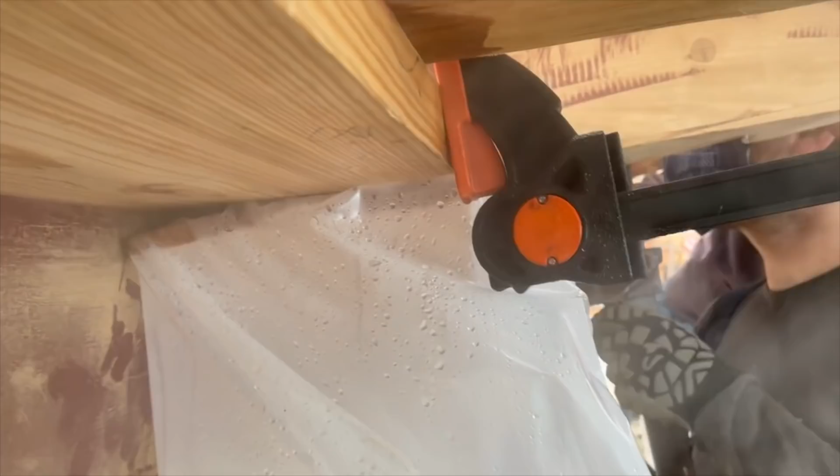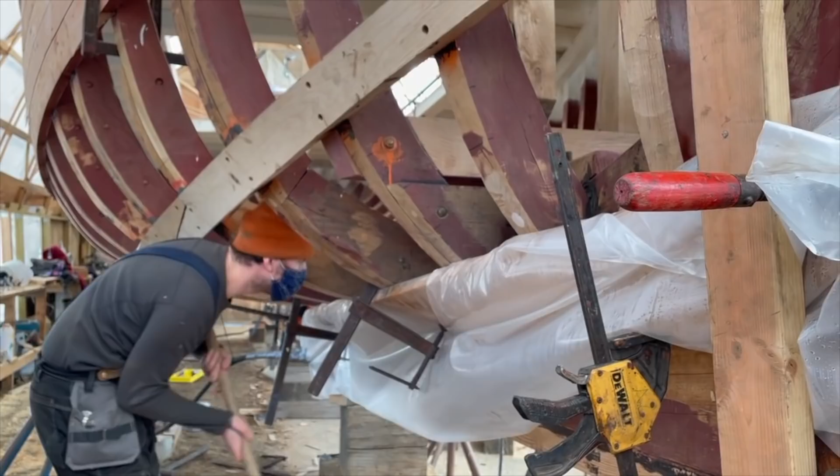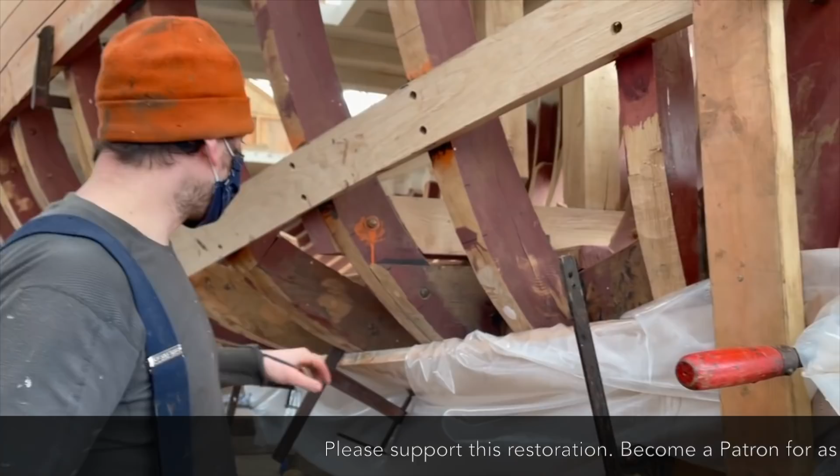Good. Andrew, when you thump it like that, are you trying to make it sit into the rabbet? A little bit. Like, I haven't cut the weirdness of the rabbet, so it's not going to sit completely yet, but a little bit better, yeah.

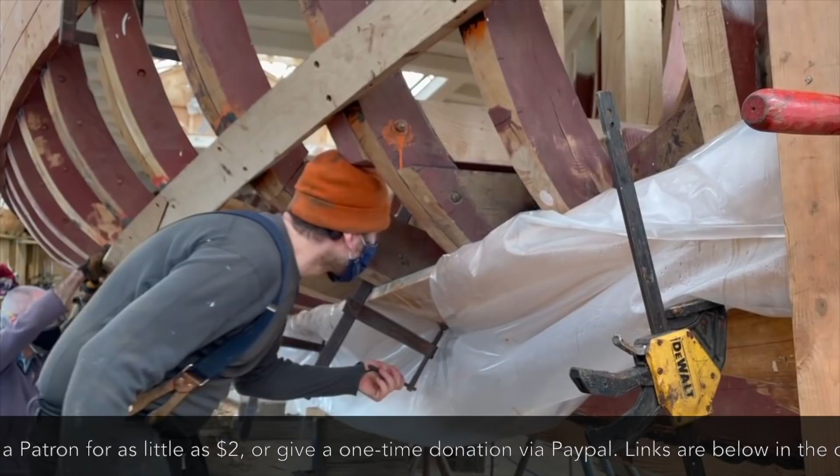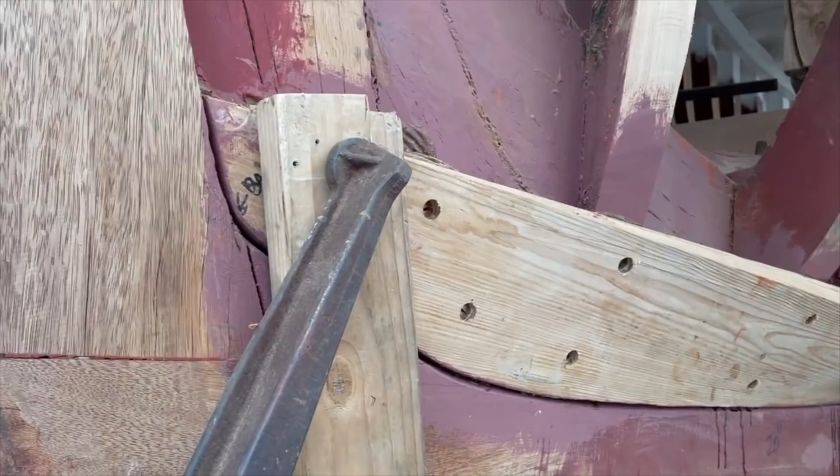So this is essentially the shape that we're making today. It's almost perpendicular to the ground here, but parallel with the ground there. Shut it off.

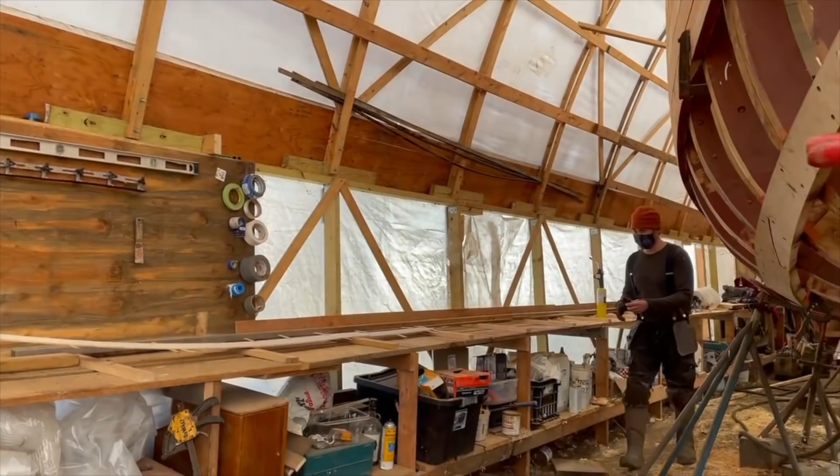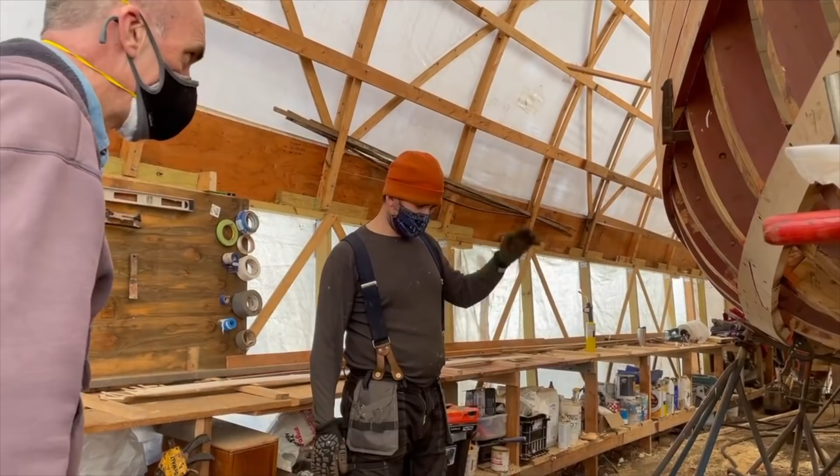Well, hey, we know how to do it now. I've got plenty more wood. So, you want to start releasing it up there? Or? Yeah, actually, if you want to go ahead with that, I'm going to go try and find another plank. Okay. Fully off, correct? Yes, thank you.

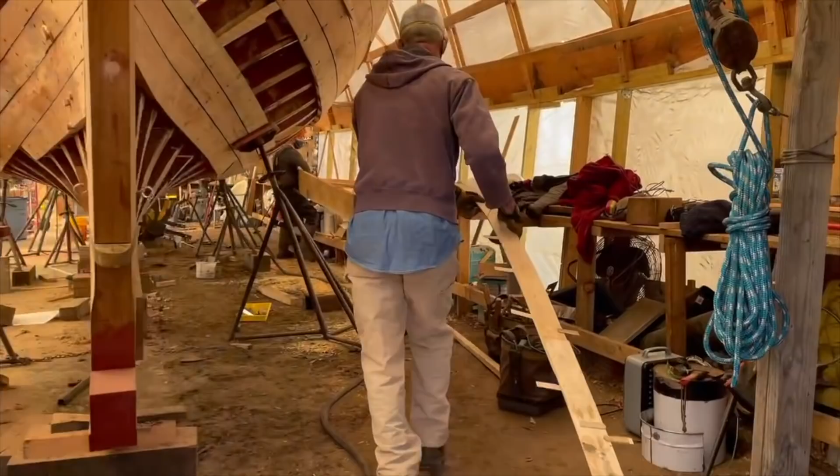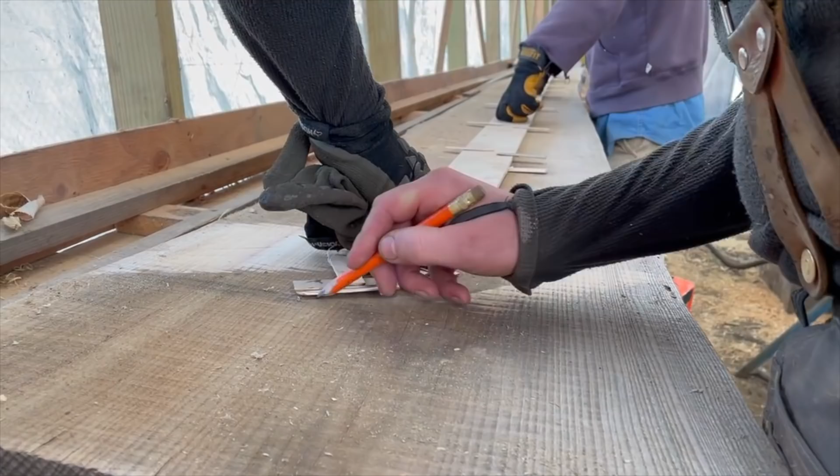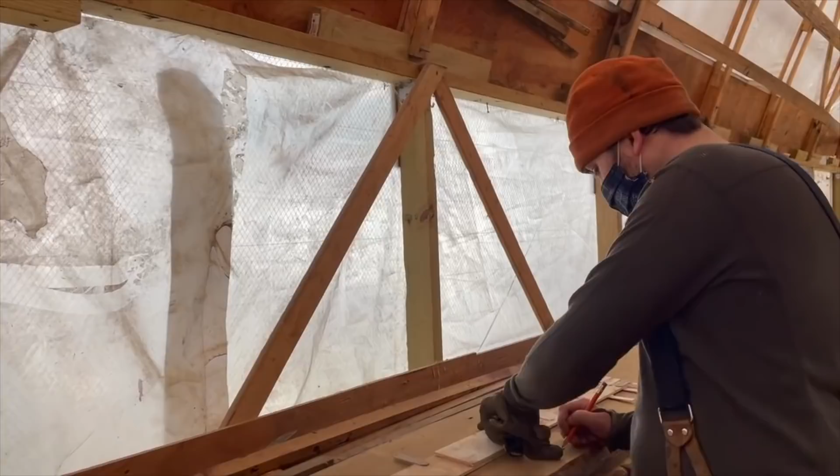The reason that there are so many sticks on this one is that I've reused the pattern from the other side one and just added a few more to make it. It was really close to the same shape, but of course the rabbet is not identical side to side. So. Okay. Awesome.

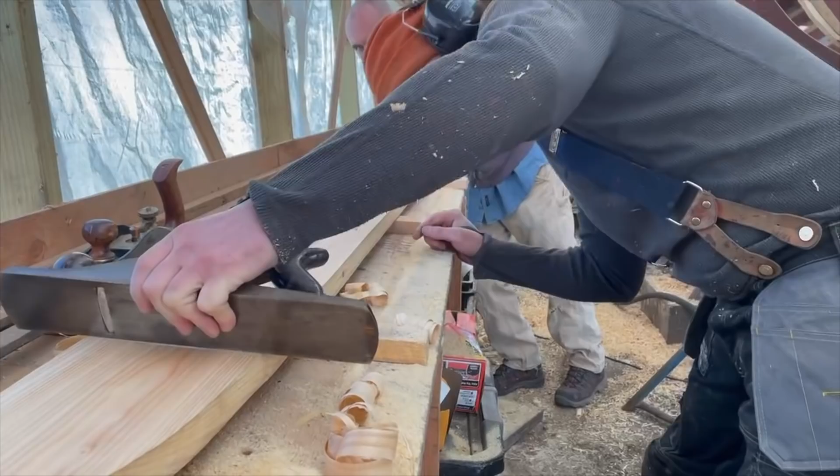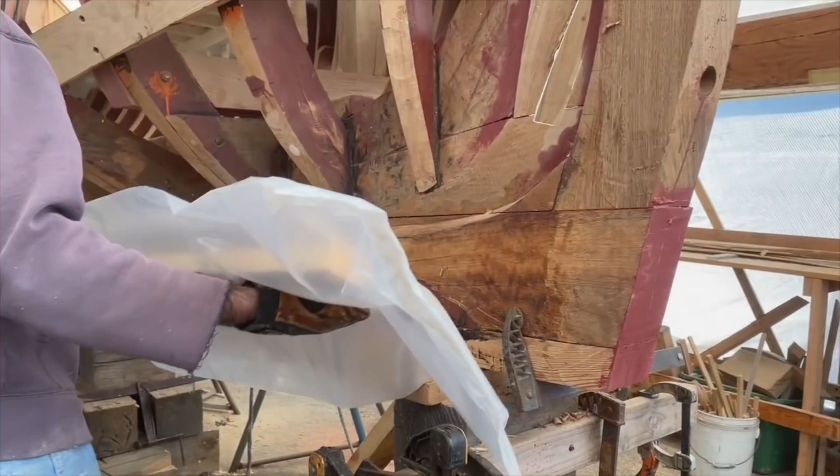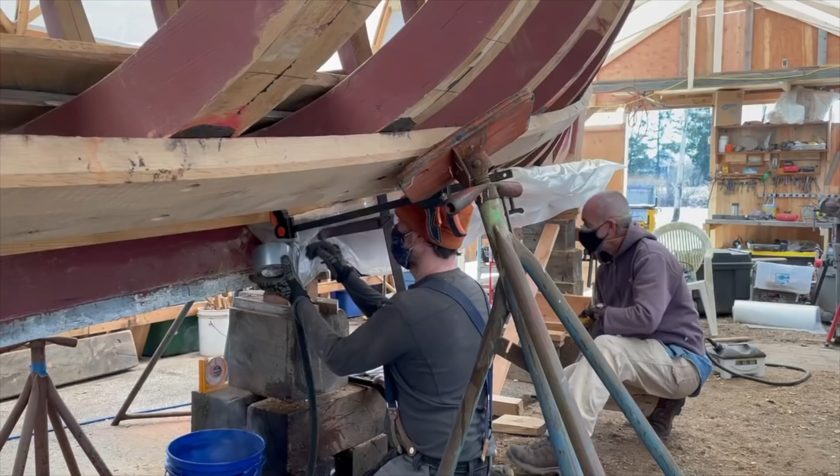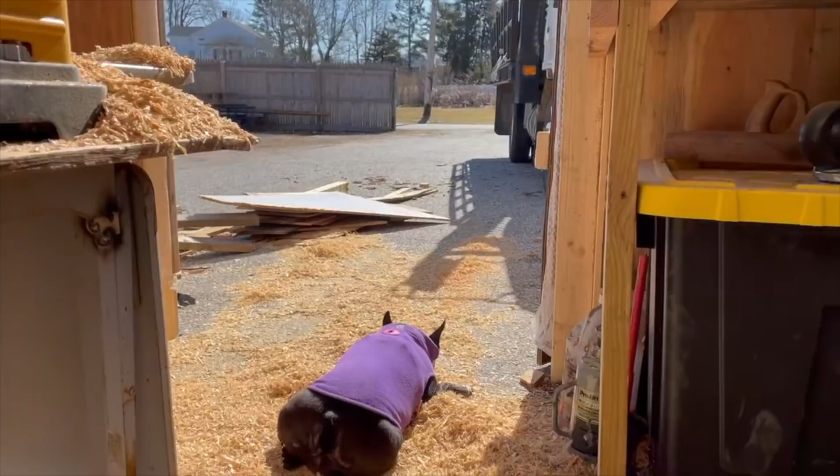You can bring it in there a little bit. Steaming there. What happened? Yeah, this one takes like... Yeah, getting the hose in before you just slip it in there. Yeah, we're still not getting the pressure that we should be getting.

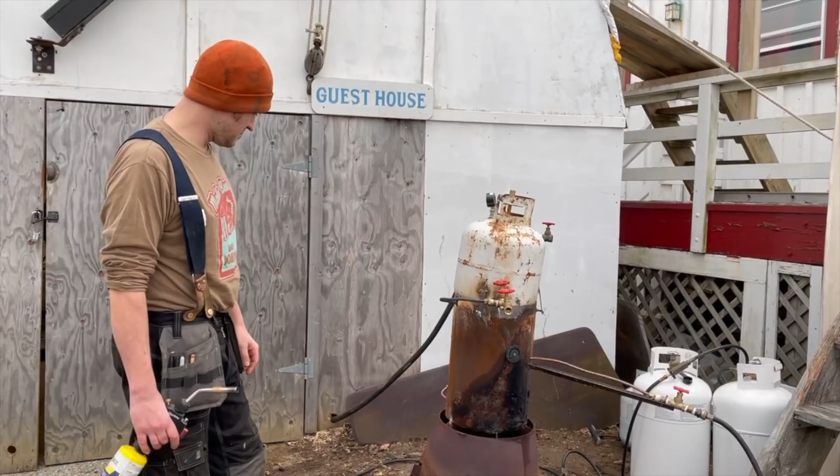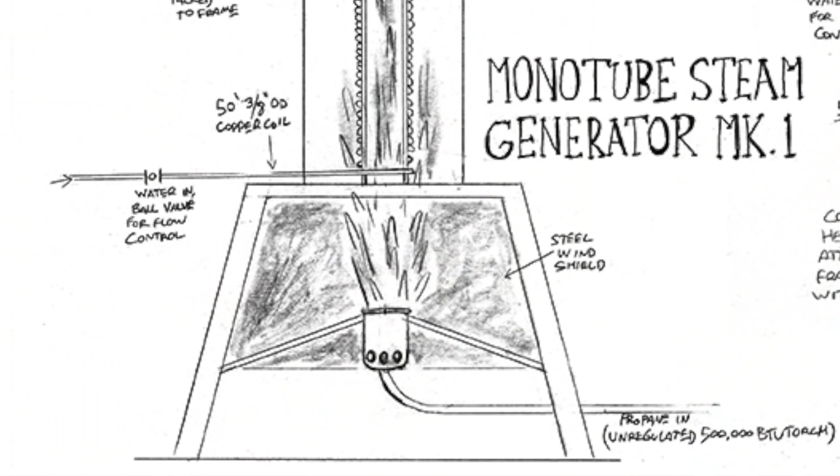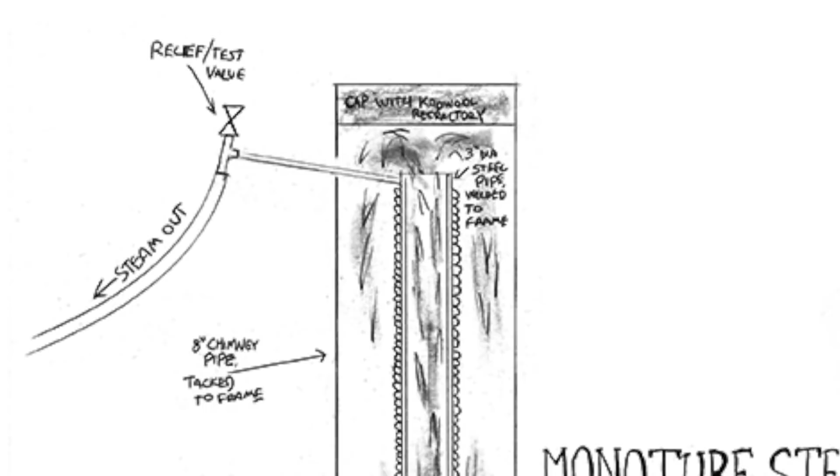This is the Mark II steam generator. It's still a monotube, but I've added a whole bunch of other features, and I think the efficiency has increased a lot. As it was, obviously it worked. It worked really well, but it was not super reliable. Like, depending on, I think, the weather, level of atmospheric pressure, even the amount of water that it needed to go through it for it to work right was so small that anything in the environment changing kind of threw it off. And also getting that amount exactly right was very difficult, especially with a ball valve, next to impossible. So it was really finicky, and I'd sort of had enough of that.

And part of my thinking was that, in essence, the water is coming in at a constant speed that's dictated by town water, which I did figure out at one point, how many cubic feet per minute or whatever it is. Doesn't really matter once you've done that. But since you're sort of limited to that and whatever additional velocity you can pick up from thermal expansion once it starts heating, essentially the water wasn't in the system long enough to all turn into steam. I only had 50 feet of coil, so that tiny bit of water was not all turning to steam reliably. Sometimes it was, sometimes it wasn't, and the difference was probably down to atmospheric pressure and temperature, so relative output of the propane, because an unregulated propane system particularly is very sensitive to differences in temperature, which this is unregulated, so that you get that massive flame.

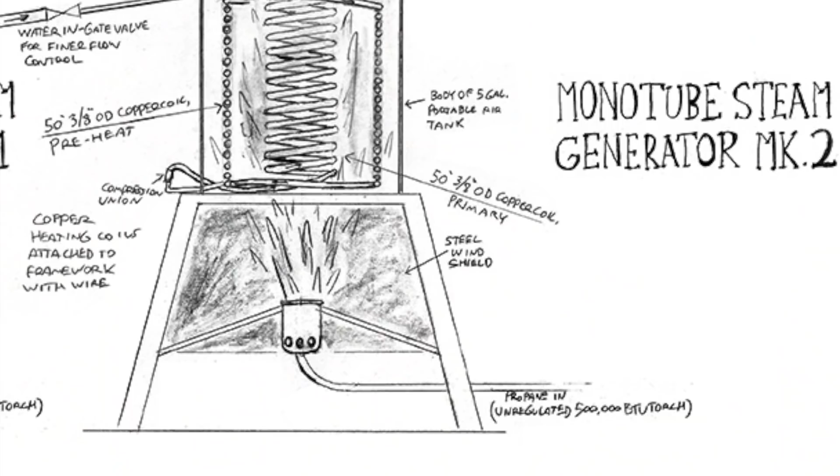So this now has about 100 feet of coil, so doubled the amount of coil that's in there. And so there's an outer coil, which is sort of like a preheat coil, which actually enters from the top, so that you pick up a bit of gravity too. So it's feeding down into the system with gravity with you, turns around at this union here, and then goes up a tighter coil up the middle, which is the primary coil, which is reused from how it was before.

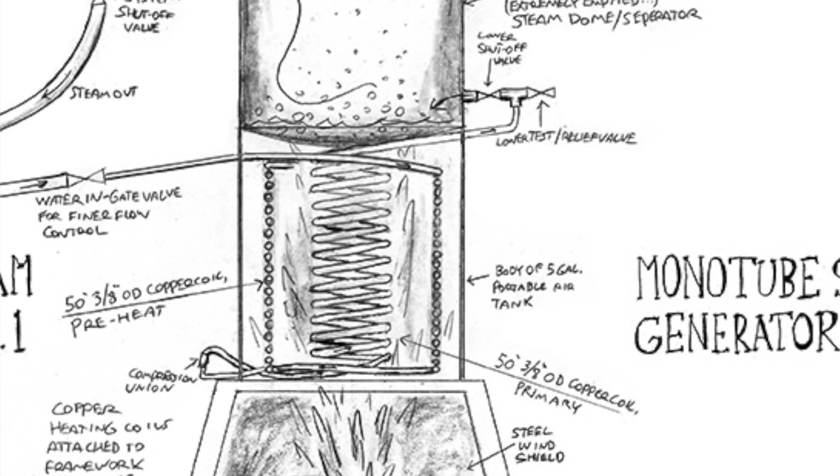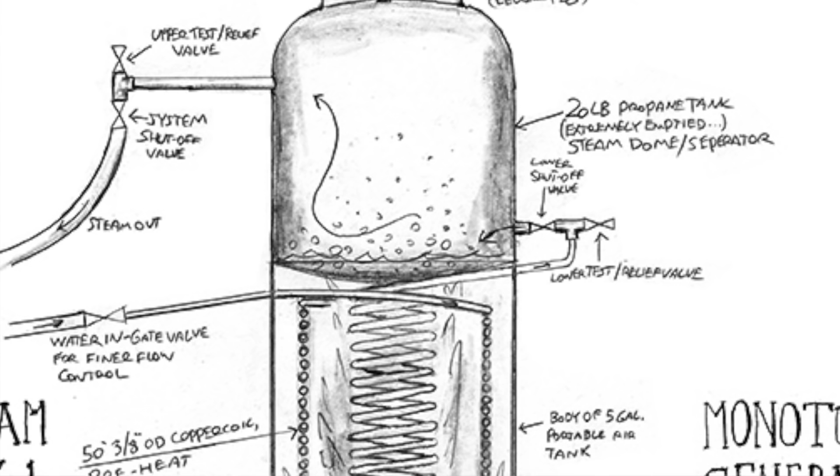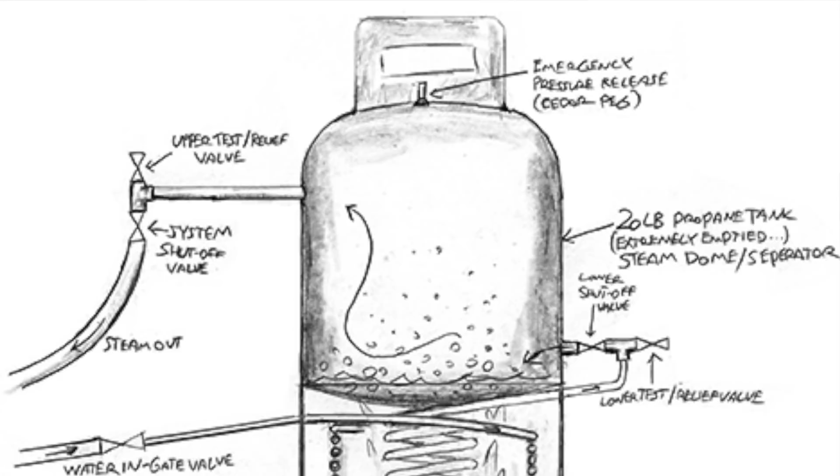That then comes out here, and I've got a test and/or relief valve here, so that I can check the lower part of the system independently, and then a shut-off valve for it to go into this extremely empty 20-pound propane tank. There was no doubt about there being any propane in there. Do not do anything like this without being very, very sure that there's no propane in here.

This acts as two things. It kind of acts as a steam dome or a steam bell, so it's a reservoir that holds that rising pressure, so that you retain a bit of pressure in the system, as opposed to it just all going in and out. And then it also acts somewhat as a separator, which is, if there is still any of the feed that is water rather than steam at this point, it will fall out to the bottom of the tank and not rise up to the outlet.

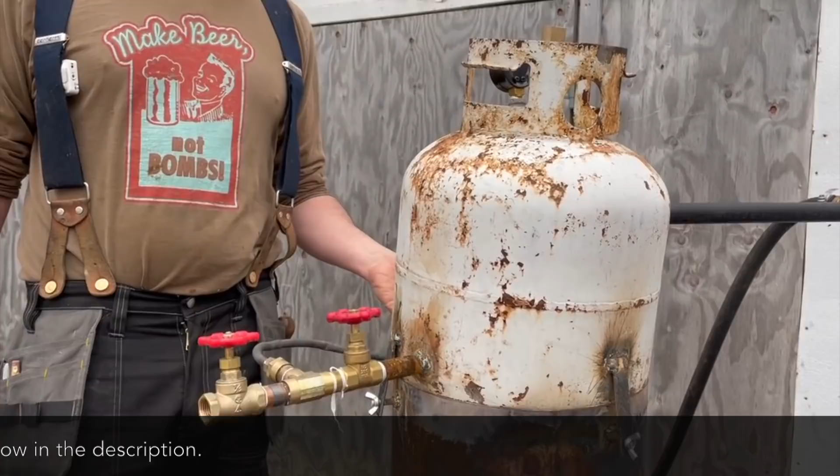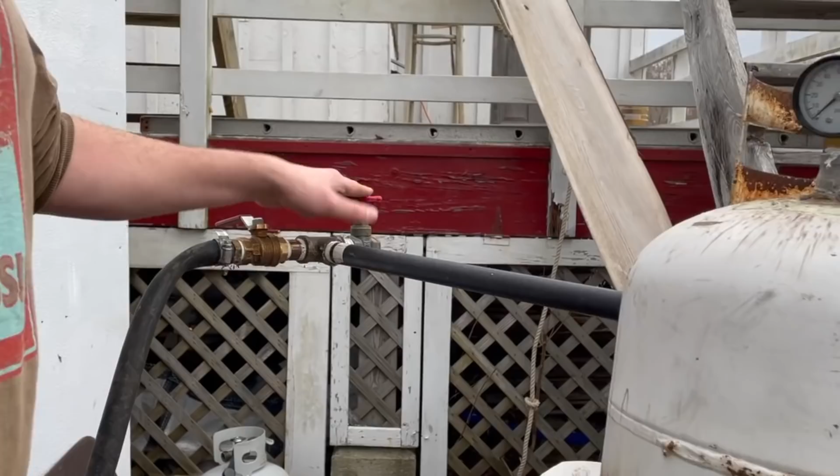It then also, because the bottom of the tank is getting hit by the flame from underneath, has another chance to turn into steam before exiting the system. So I've probably tripled the amount of heating surface, maybe even more. Not entirely sure how to do that math, but then I've got another test and/or relief valve here for checking the upper part of the system, and then just a ball valve shut off for the steam output, which goes down this heater hose to wherever I'm bending a plank in.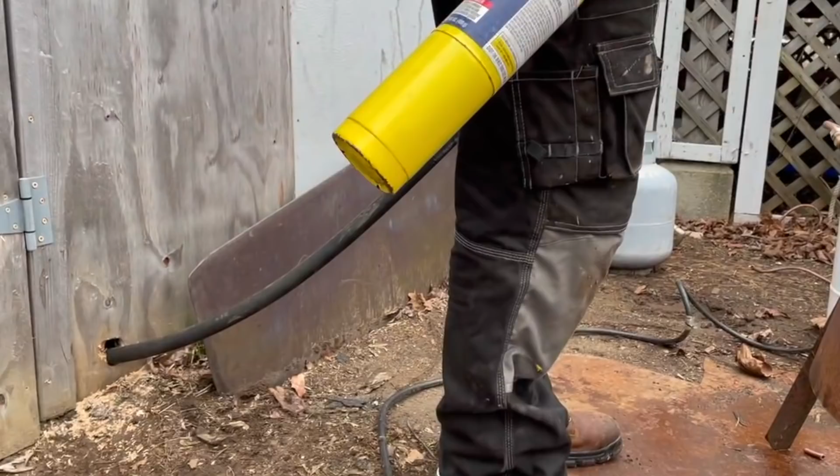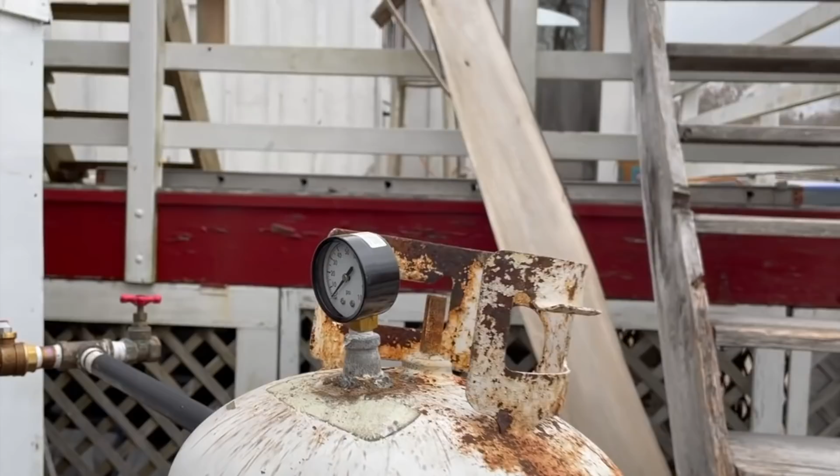I also added this extremely high-tech safety feature, which is a cedar peg stuck in a hole. The thought being that this will fly out at high velocity before this explodes, if I ever generate that amount of pressure, which I don't seem to be. I put this gauge on here so that I'd have some idea of what kind of pressures I'm generating, and for the most part, I'm hardly generating any pressure in here. It kind of flickers between 1 and 5 psi, as long as it's going out somewhere. If I shut everything, I'm sure it would build pretty quickly, but there's no reason to do that, other than idle curiosity, which could make the whole thing explode. So I'm not going to do that.

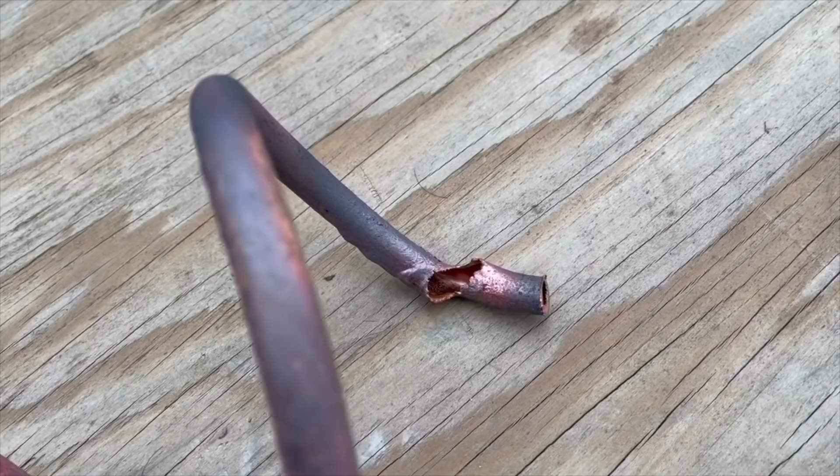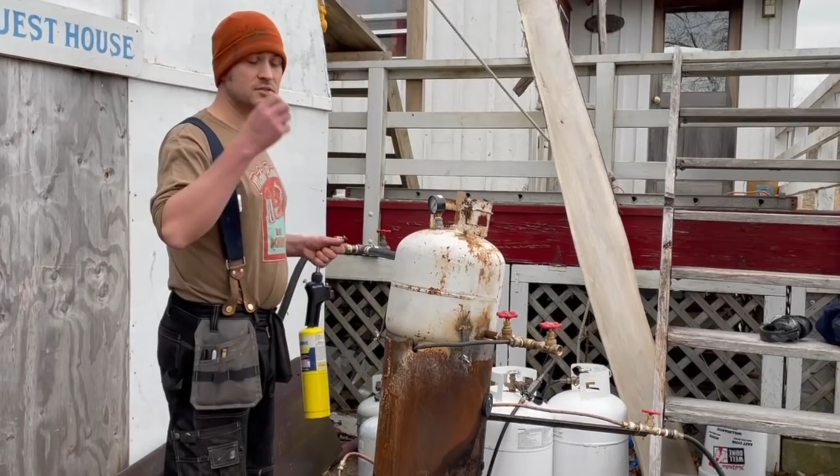Speaking of explosions, I did have a minor mishap test firing this. As far as I can tell, there was pressure coming back down the line that stopped the steam from coming out for a little bit, so there was essentially a blockage, and then when that cleared, it cleared very suddenly, I think, and it actually blew out a little section of this soft copper pipe, which is another safety feature. This whole lower part of the system, if it explodes, it's a non-event. It just pops open and water comes out and puts the flame out. So in some ways it's very safe, which is counterintuitive. But yeah, it works really well as long as I don't do that. So here we go.

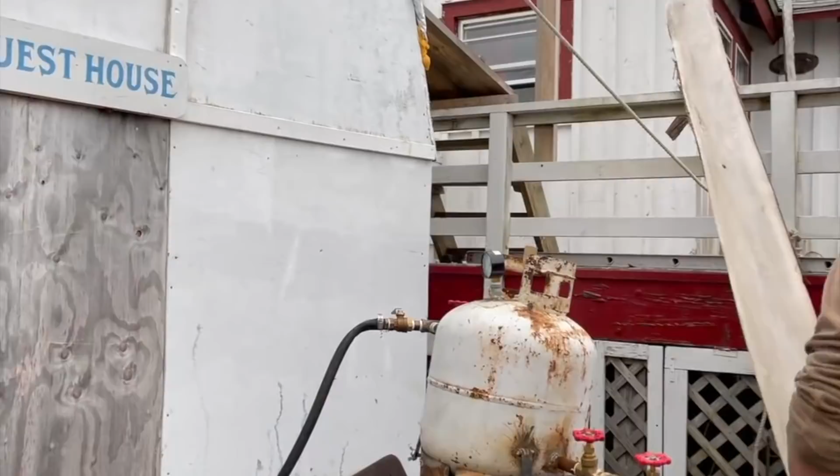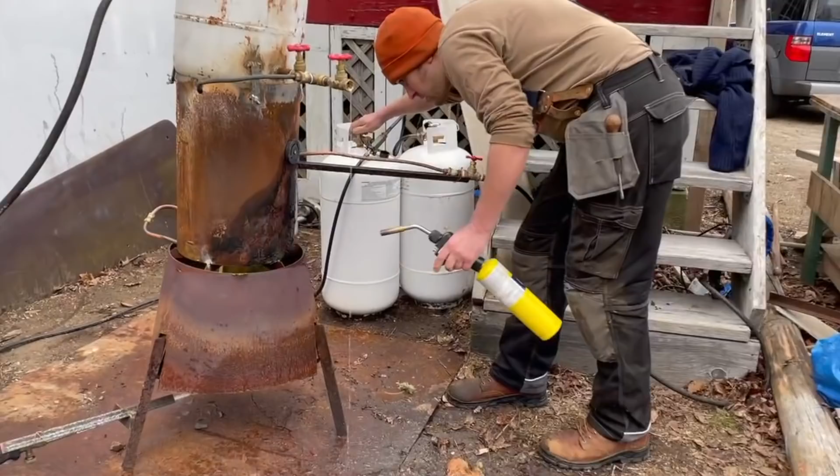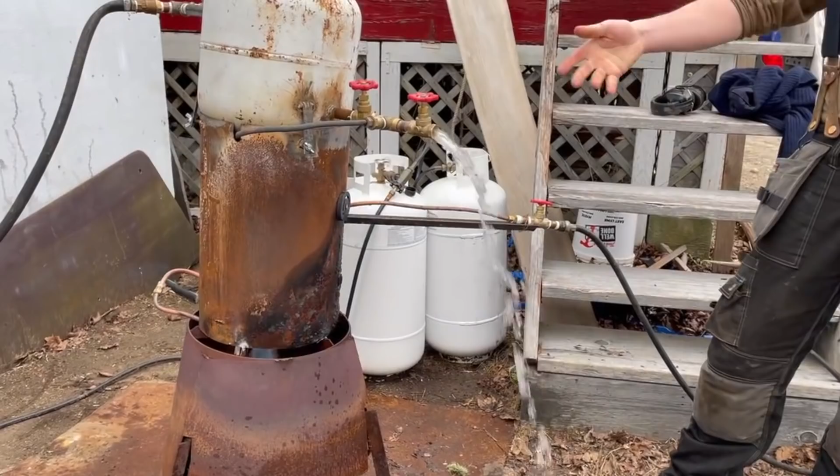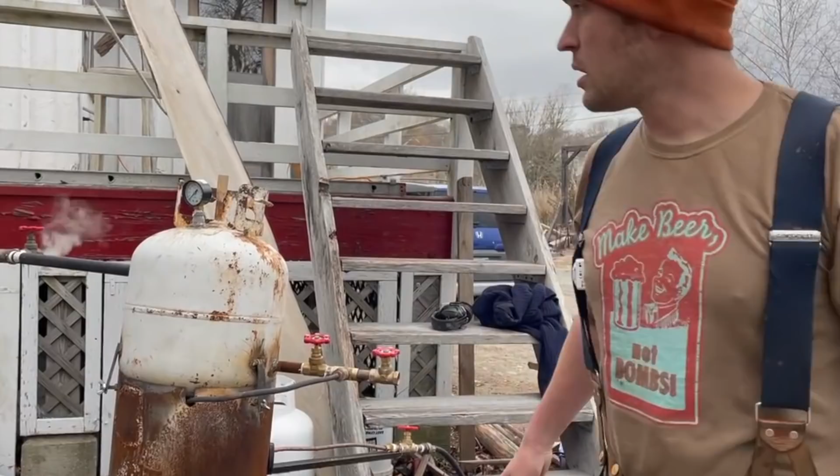So the correct amount of water is still relatively low, but not nearly as finicky. And also I've put gate valves on everything, which give you finer control than you have with a ball valve. So that is, I think, about right. And then it starts heating up instantly. This is now picking up due to thermal expansion, and I have steam already. So I'm going to open up the valve into the tank, shut this one off, and getting the upper part of the system to start producing takes a little bit longer than that, but you get a little bit straight away, pretty much.

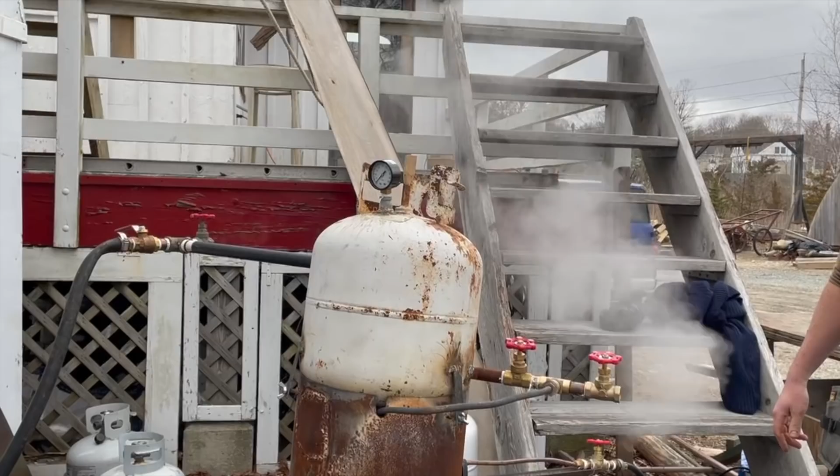I need to check on it every now and again to see what's going on in there. Very good. There you have it. And once I'm confident it's going nicely, I'll open up the outlet valve and shut that gate valve off, and away you go.

It's a lot of really hot steam really quickly, and there's very little in it that's still water. It's not bad to have water in your steam for steaming planks. In some ways that's better. However, it does block your hose. Little bits of water, especially if the hose has to go up and over things, tend to stop the flow of the steam, which is irritating and potentially an issue. At long last, we have harnessed the infernal power of steam.

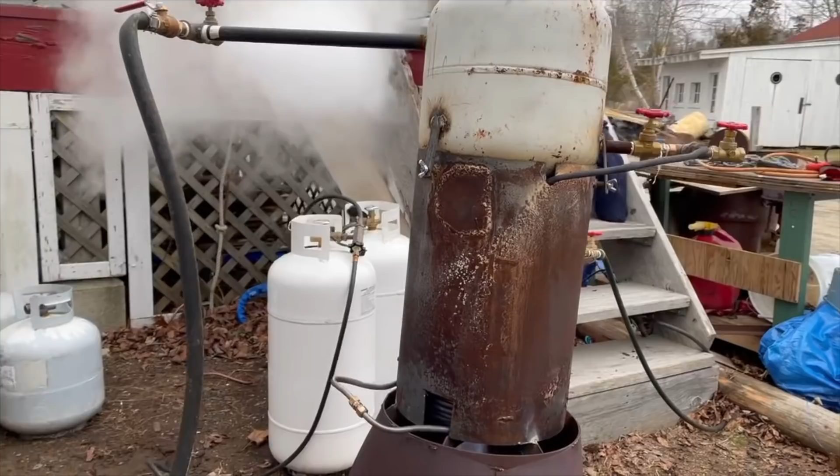So the base of this is the same. It's sort of cobbled together from one of those outdoor propane grill things, but with longer legs welded onto it and a windshield welded onto it. And now the casing is the middle part of a 5-gallon portable air tank with the ends cut off, that 100 foot of copper coil up the middle, and a 20-pound propane tank. So it's a lot of fittings and valves. It wasn't entirely inexpensive to do this, but the amount of steam is worth it. So. Yeah.

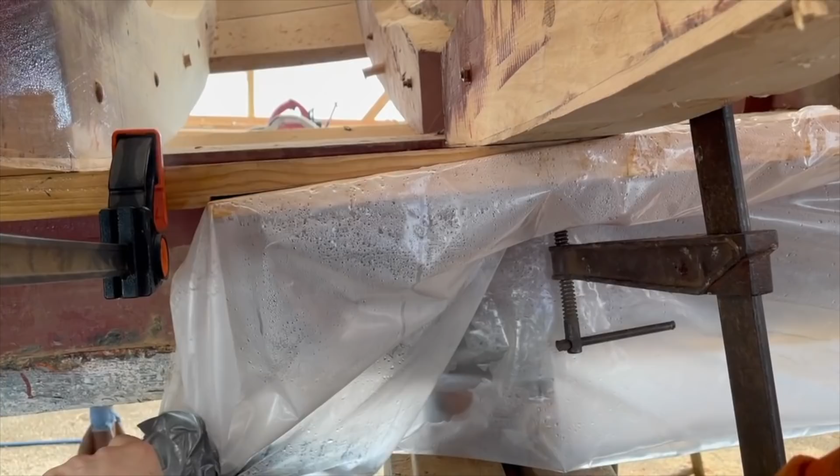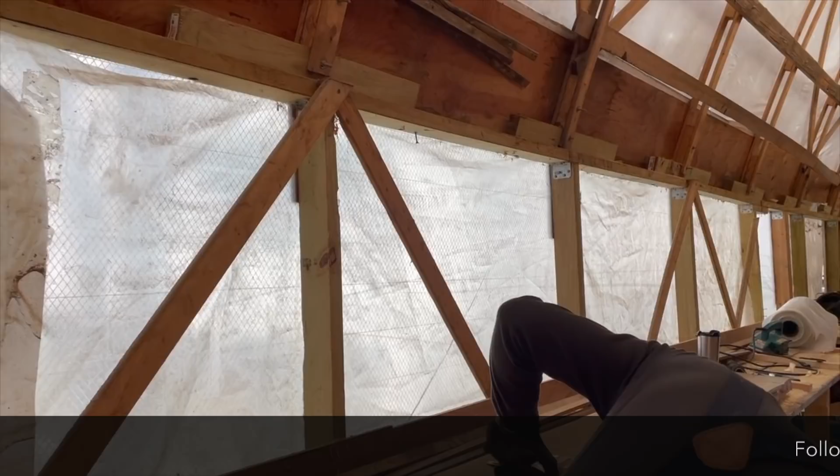Be a part of this process. Yeah, you're getting the whole experience. Yeah, because didn't you cut that rabbet, Dane? I helped cut it. Yeah. No, I showed Andrew how to do it, and then let him do the rest. I mean, all of my experience, and yeah. I mean, I've read a lot about boat building. So naturally, I'm the experienced one.

Shit, I don't know what I'm gonna say. Beans. Just look square into the camera and go, monotube steam generator Mark II. Beans. That's what you wanted me to do, right? That's basically what you said. That's what I said. Okay. Beans. All right. Right. So now all we've got to do is build a sauna, innit?